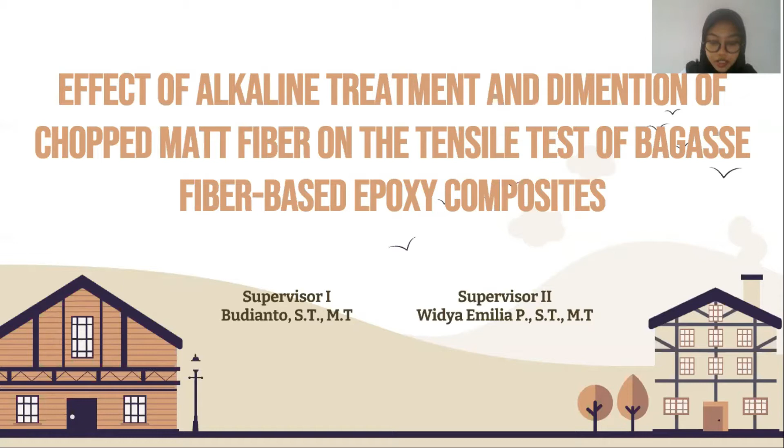The title is Effect of Alkaline Treatment and Dimension of Chopped Mat Fiber on the Tensile Test of Bagasse Fiber-Based Epoxy Composite. The supervisors of this final project are Mr. Budianto and Ms. Widya Emilia.

This is the outline of the presentation. 1. Preliminary is about background, research problem, research objective, research significance, and research delimitation. 2. Review of related literature. 3. Research method. 4. Result and discussion. And last is closing. In the first chapter, I would like to explain the preliminary.

Indonesia is famous as a country that has many islands with a wide sea, thus making the shipping industry a strategic sector for the national economy. This makes the shipping industry try to improve the quality of ship production. One of them is the selection of material in the preparation of a ship that has better physical strength, durability, and quality. One of the common materials is fiberglass, which has a lightweight construction and has a long service life because it does not rust.

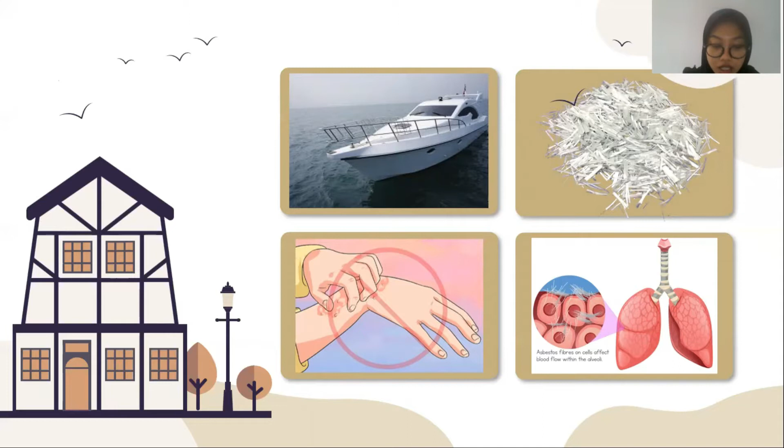However, fiberglass has drawbacks which can cause skin irritation and asbestosis. Therefore, fiberglass material with natural fiber such as bagasse fiber is needed, which is environmentally friendly and easy to obtain. Bagasse fiber is found throughout Indonesia, especially the islands of Sumatra and Java. So far, sugarcane has only been used as the main ingredient of sugar, while bagasse has only been used as fuel for the production process and for power generation.

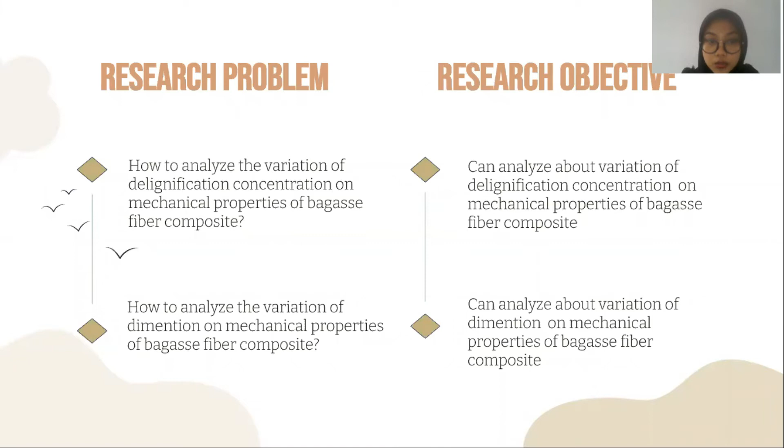It is hoped that bagasse fiber can be used as raw material for making composites and add information about innovation in shipbuilding using natural fiber. And this is the research problem and research objective. This is the research significance. This is the research delimitation.

In this research, there are several limitations. The fiber comes from bagasse fiber, and the resin type is epoxy. 3. Testing of mechanical properties is tensile test, and the reference standard is ASTM D3039. 4. The delignification process uses 0% and 3% of natrium hydroxide in 1 hour. 5. The composition of the fiber used is 35%, with random orientation.

7. The fiber type is discontinuous fiber, with dimensions of 5 millimeters, 10 millimeters, and 20 millimeters. 8. Reinforcement type is chopped mat fiber. And then the method of specimen fabrication is the hand lay-up method. And the last, the number of layers in this composite is 2 layers.

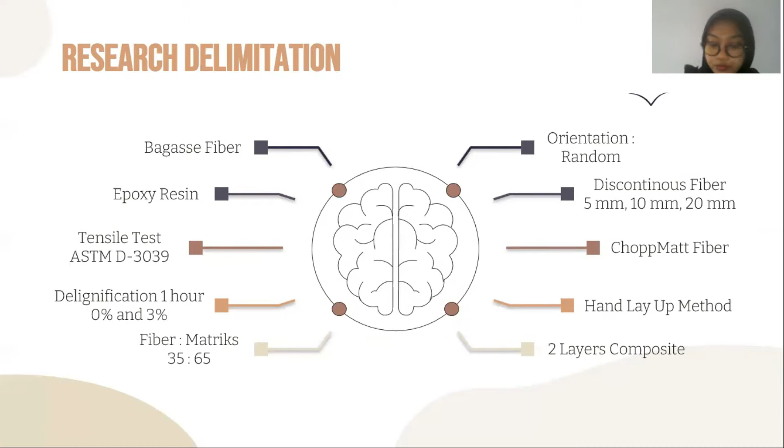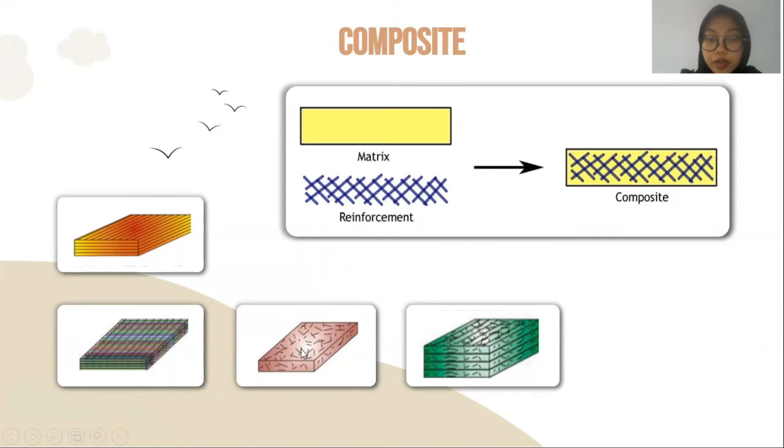The next chapter is review of related literature. The first is composite. Composite is a material composed of 2 or more main materials. 2 important materials in the manufacture of composites are reinforcement and matrix. Based on the placement, composites are divided into several types, namely continuous fiber composite, woven fiber composite, chopped mat fiber composite, and hybrid composite.

And then delignification. Delignification is the process of modifying the fiber surface by immersing the fiber in natrium hydroxide. The purpose of the delignification process is to reduce the components that make up the fiber that are less effective in determining the strength of the composite, namely hemicellulose, lignin, or pentose.

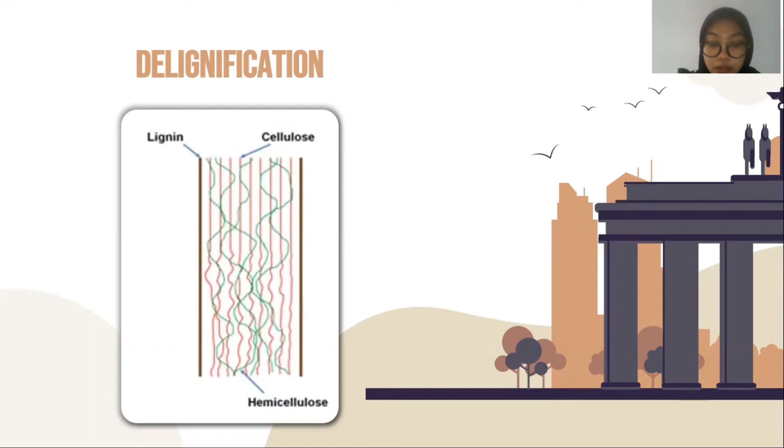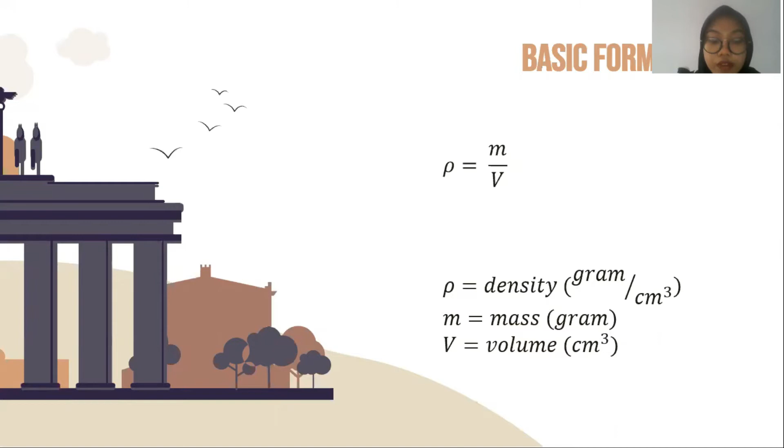Next slide is the basic formula in this research. Basically, the calculation in this study refers to the formula. Calculation of density uses a pycnometer, and calculation of fiber and resin requirement uses this formula. Okay, now let's move to the next chapter. This is the research method.

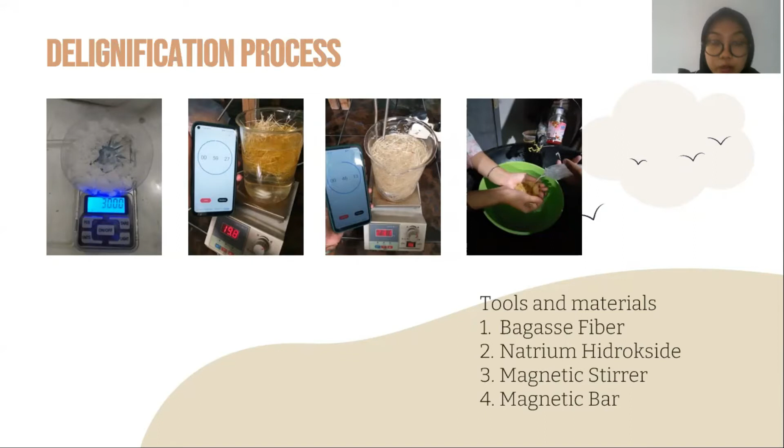The first stage in this research is the delignification process. This process uses 0% and 3% natrium hydroxide for 1 hour. In this process, a magnetic stirrer is used to assist the immersion process. After 1 hour, the fiber is washed and then dried and prepared for the next process.

The next is the density test. The early stage of this process is weighing the pycnometer and fiber. After that, the calculation uses the basic formula mentioned in the basic theory. And then validate the decrease in lignin level with the FTIR test. The FTIR test tests specimens in compacted powder form. The tested powders were fiber powder before delignification, delignified fiber powder without natrium hydroxide, and fiber powder after delignification with 3% natrium hydroxide.

FTIR test is a test that uses infrared light to identify the compound. The analysis is carried out by looking at the resulting spectrum, where the specific peaks indicate the type of functional group of the compound. And then layer creation.

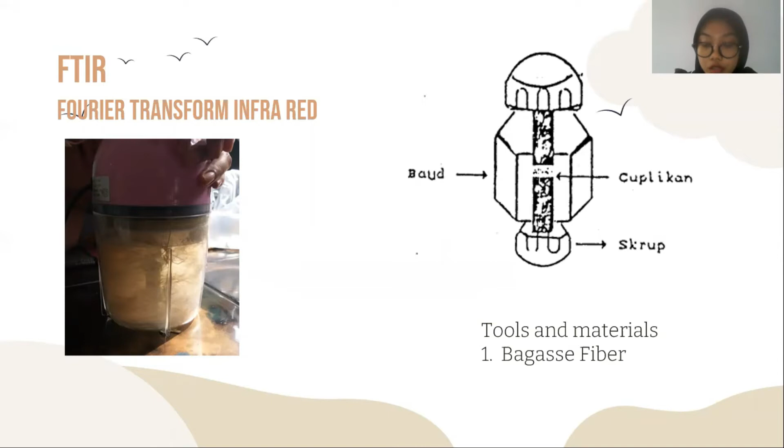In this process, bagasse fiber that has undergone a delignification process and has been cut according to the variant in fiber length is weighed according to the composition calculation as much as 35%. Then, the bagasse fiber is placed in a mold on a screen. Next is mixing water and glue in a basin or container, then pouring it over the fiber. And then, pressure is applied to the screen and then dried until the water content is at the minimum level. The dry layer is pressed using a roll machine until the layer thickness is less than 1 mm.

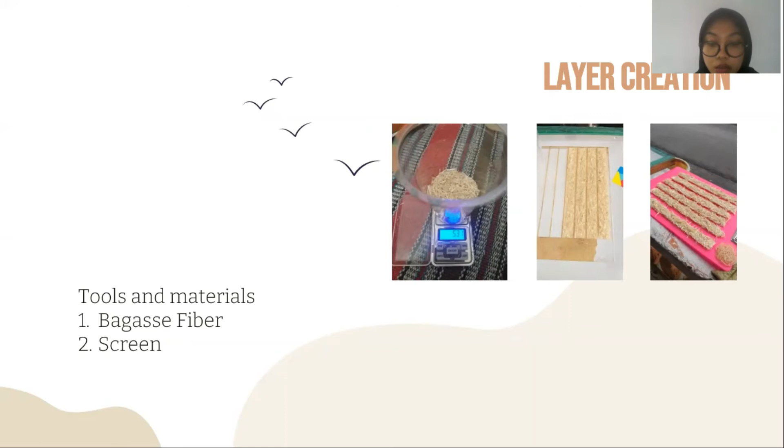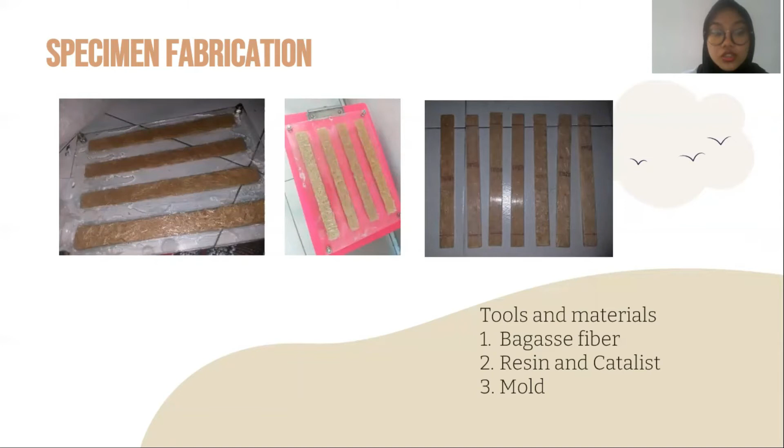The next process is specimen fabrication. In this process, the composition is calculated by volume fraction, with the matrix as much as 65%. Then the layers are arranged on the mold, and the resin and hardener are mixed in a ratio of 3:1. A mixture of resin and hardener is applied to the layer using a roll, then dried until it hardens, and then the composite is separated from the mold. A marker is given to the specimen according to the name of the fiber variation in the composite.

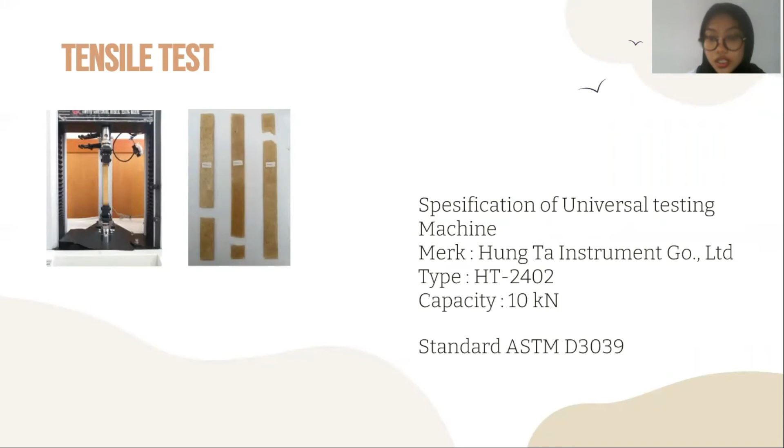And the next process is tensile testing. The test is carried out using a universal testing machine with a capacity of 10 kilonewtons, and the testing standard is ASTM D3039. The next is a statistical test using two-way ANOVA. This is the hypothesis for the concentration of natrium hydroxide and length of fiber. The rejection condition is H0 if the p-value is less than alpha or the F-value is greater than F-table.

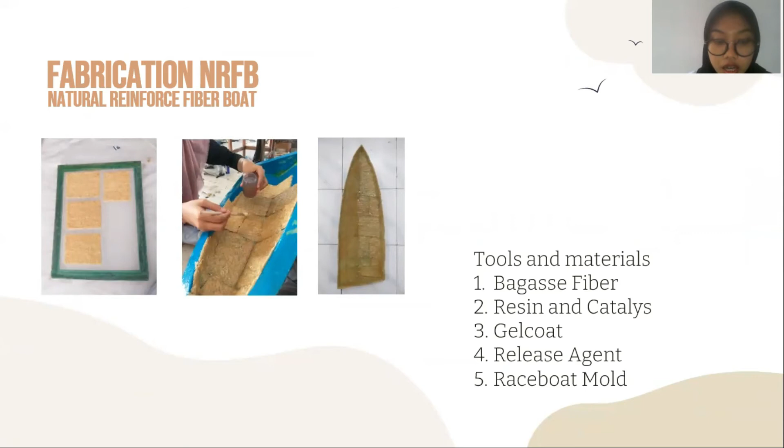And then the last stage in this research is the fabrication of natural reinforced fiber boat with natrium hydroxide concentration of 3% and a fiber length of 5 mm, which are the variations that produce the highest tensile strength. And then the next chapter is about the results and discussion of this research.

This is the result of the density test. Fiber density without delignification is 1.01 gram per cubic centimeter. Fiber density with immersion without natrium hydroxide is 0.97 gram per cubic centimeter, and fiber density with 3% natrium hydroxide immersion is 0.76 gram per cubic centimeter.

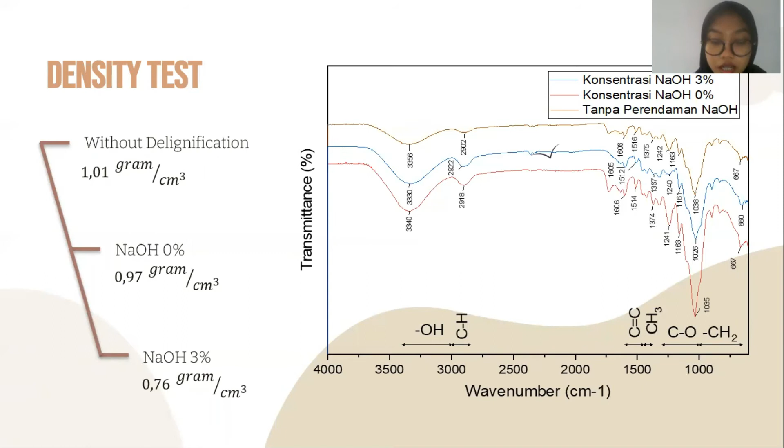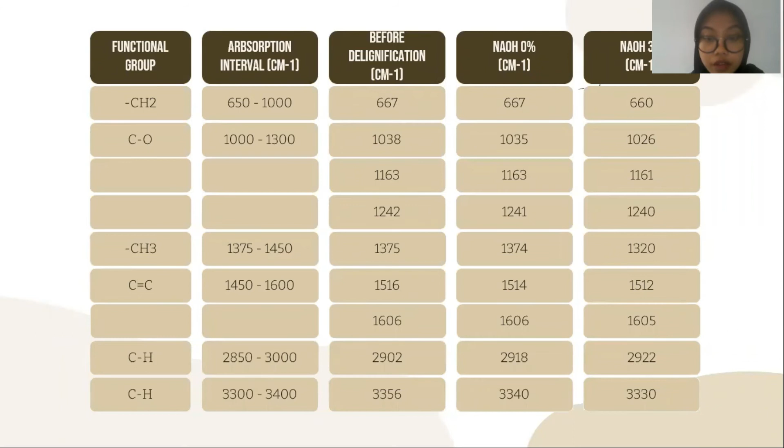In the fiber after delignification with 0% natrium hydroxide, the wavelength of the C=C functional group becomes 1514 and 1606, while in the fiber delignified with 3% natrium hydroxide, the peaks showing the C=C functional group are 1512 and 1605. So the delignification process does not completely remove lignin, but only reduces it.

Next is the tensile test result. At a concentration of 0% natrium hydroxide, the highest tensile strength is at a fiber length of 5 millimeters. The shorter the fiber, the more evenly it is distributed in the chopped fiber, so the tensile strength also increases. But at a fiber length of 10 millimeters, the tensile strength is lowest. The fibers are arranged perpendicular to the direction of the force, so the fiber will break easily.

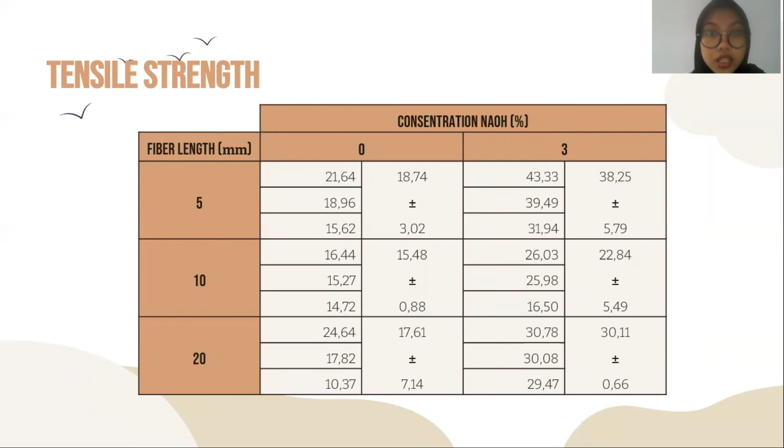Meanwhile, at the 3% natrium hydroxide concentration, the highest tensile strength was also at 5 millimeter fiber length. At fiber lengths of 5, 10, and 20 millimeters, the highest tensile strength was in fiber with 3% natrium hydroxide immersion. This happened because bagasse fiber, which underwent delignification with the addition of natrium hydroxide, experienced a reduction in lignin, which increased the ability of the fiber surface to bond with the matrix. So bagasse fiber delignified with 3% natrium hydroxide has greater tensile strength. This is the chart of tensile strength for all variations in this research.

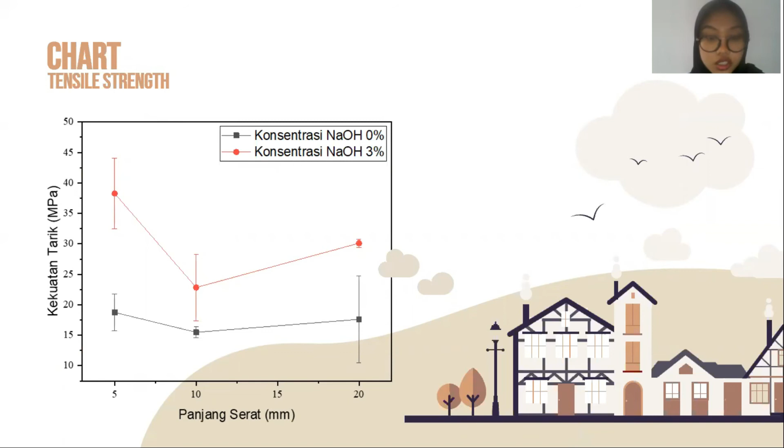Next is the result of ANOVA. For the concentration and fiber dimension variables, the p-value is smaller than alpha and F count is bigger than F table. According to the ANOVA result, H0 is rejected for both independent variables. So it can be concluded that the concentration of natrium hydroxide and length of fiber affect the tensile strength.

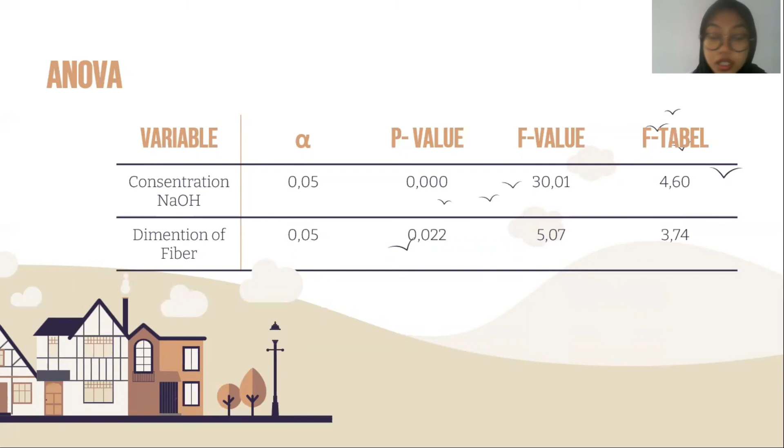Next is the result of NRFB fabrication. The natrium hydroxide concentration used in NRFB fabrication is 3% with a fiber length of 5 millimeters. Constraints occurred during the fabrication process, namely when applying resin to the top of the hull in the mold. This happens because the dimensions of the layer used are too small, so some parts of the top of the hull in the mold are blank, and for its application, a layer is used that covers it.

Then, when applying resin to the top of the hull, the mold is tilted first so that the small pieces of the layer do not fall off, and so that the layer can stick perfectly according to the shape of the mold. The following is the NRFB when tested in water.

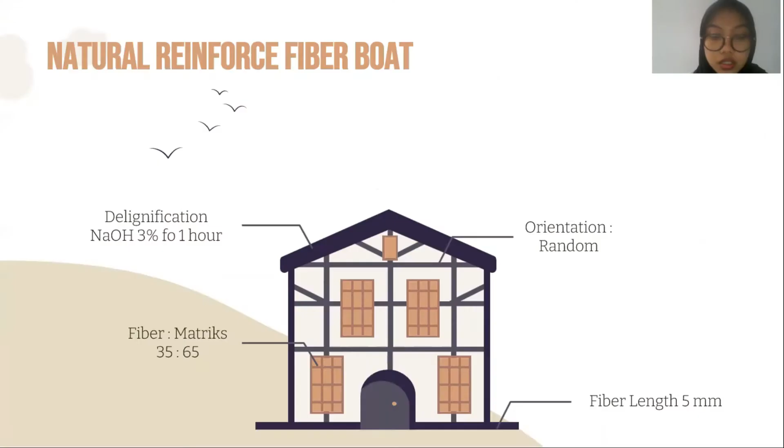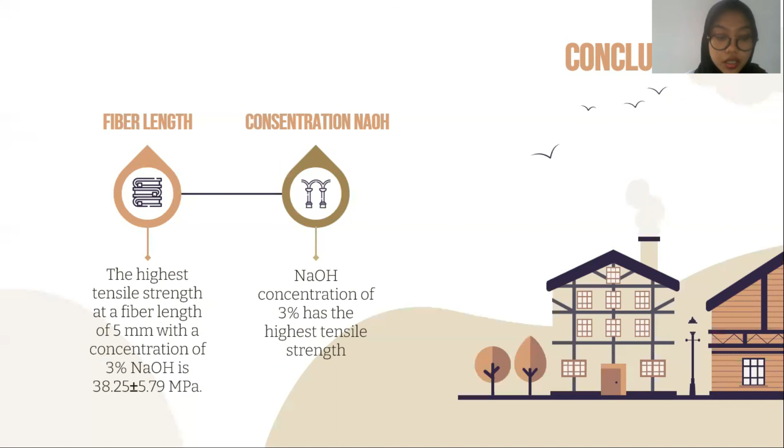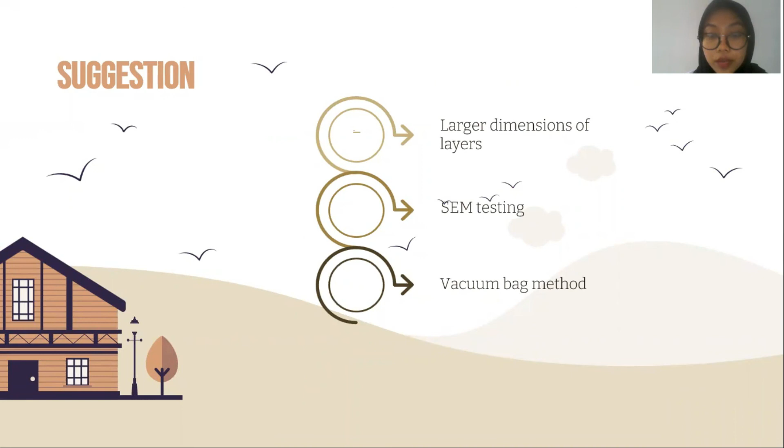And the last chapter is about closing. This is the conclusion of this research. The highest tensile strength is in the composite with a concentration of 3% natrium hydroxide, and the fiber length with the highest tensile strength is 5 millimeters. The following slides are suggestions for further research. First, use a layer with larger dimensions. Second, micro-observations such as scanning electron microscope, or SEM, should be carried out on the composite. The last is using the vacuum bag method to minimize voids.